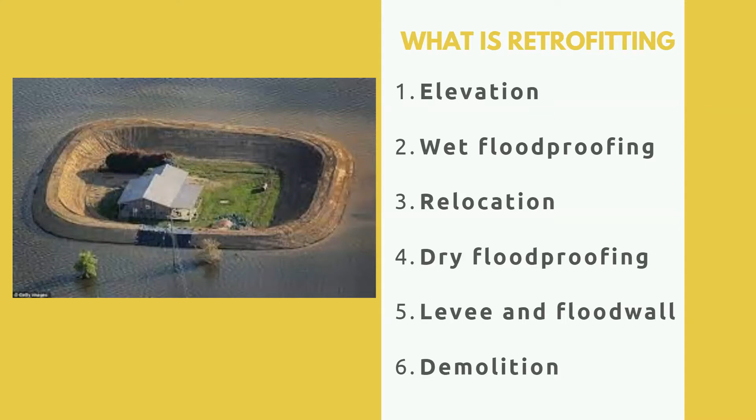In this module, we'll review retrofitting methods. Retrofitting is making changes to an existing building to protect it from flooding or other hazards. Methods include elevation, wet flood proofing, relocation, dry flood proofing, levee and flood wall, and demolition and rebuild.

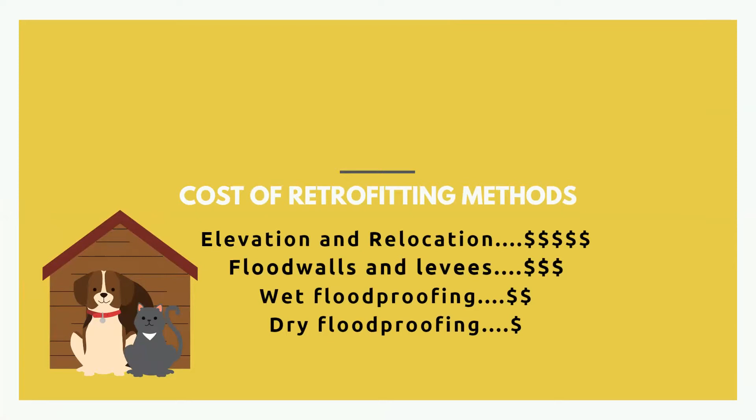It depends on many factors, including how much work needs to be done to your foundation, what other improvements you're making, the type of construction, the cost of materials, which we know are higher in Monroe County than in most places, and so on. Each project will be different, and you'll be able to work with your contractor to control some factors. We know that everyone here just wants to know how much will it cost, but it's complicated.

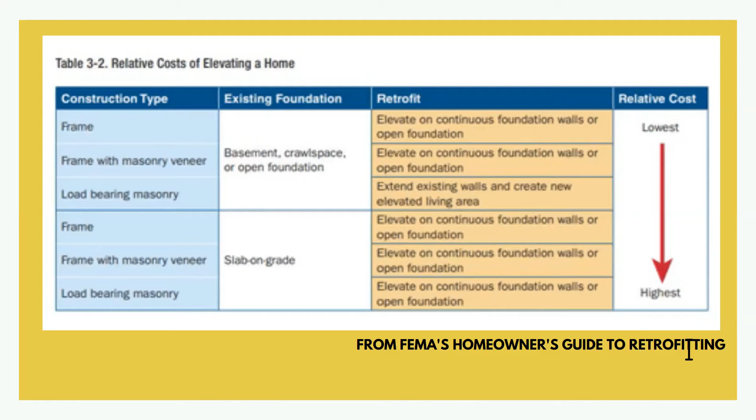So I'm going to focus on wet and dry flood proofing in this module, since elevation is covered extensively elsewhere, and flood walls and levees are not practical in the Keys with our limited buildable land. Elevation and relocation reduce insurance premiums, while wet and dry flood proofing reduce your risk of loss. So what does this mean? If you elevate or relocate your structure above the floodplain, obviously your insurance premium will be reduced.

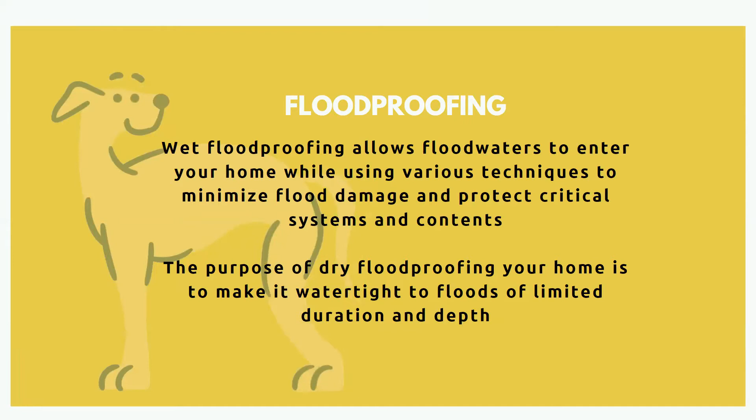If you are not ready to elevate because of the cost or other factors, wet and dry flood proofing methods may help you protect your property and make your cleanup faster and less costly, but no credits will be applied to reduce your premium. Wet flood proofing allows floodwaters to enter your home, and dry flood proofing keeps the water out for limited depth and duration.

So if the water is allowed in, then wet flood proofing methods are for spaces where you can easily move your possessions out of the way or are uninhabited. These methods can include flood vents installed in portions of your home that are not inhabited, such as crawl space or storage enclosure, installing pumps to help the water move out, elevating or relocating your mechanical systems and large appliances,

and so on. Anywhere in your home, you can also use flood damage resistant materials such as concrete, tile, stone, pressure treated and decay resistant lumber, and epoxy coatings that resist the damage and are easier to clean up.

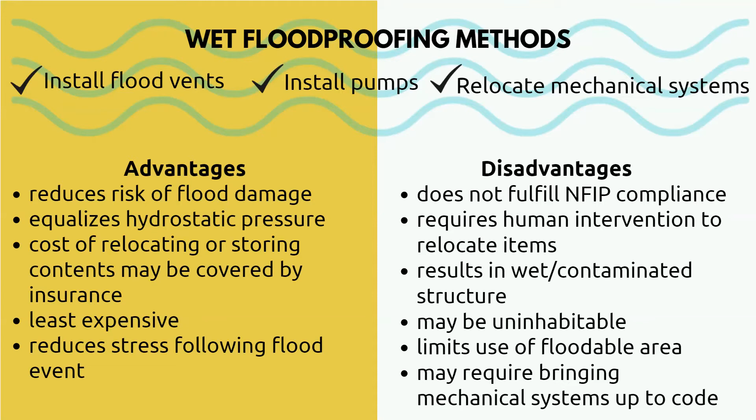Dry flood proofing involves completely sealing the building exterior up to a certain height to prevent the floodwater from entering. Water may still seep in, so you may need some sort of drainage system. This can be achieved with water-resistant coatings or membranes and shields for openings. Because the walls are exposed to the pressure of the water, these methods are only suitable for concrete or masonry structures or low flood depths of 2 to 3 feet.

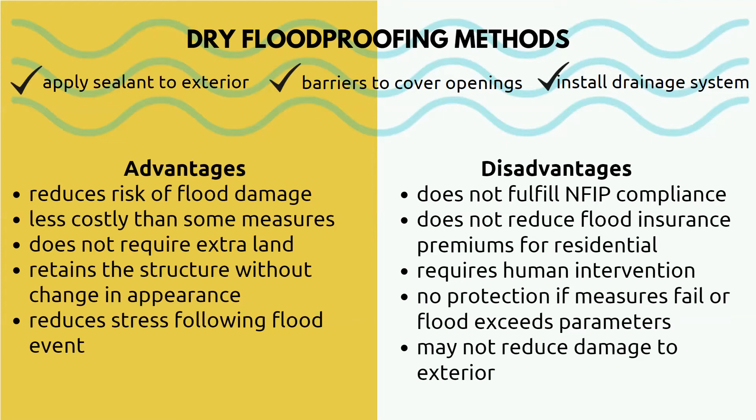Before you invest in any of these methods, talk with your insurance agent to determine the value. As I said, you won't get credit towards your premium, but if it saves you money and stress by reducing your risk, it may be worth it. Additionally, commercial buildings do receive credit from some methods of flood proofing. Talk to your insurance professional.

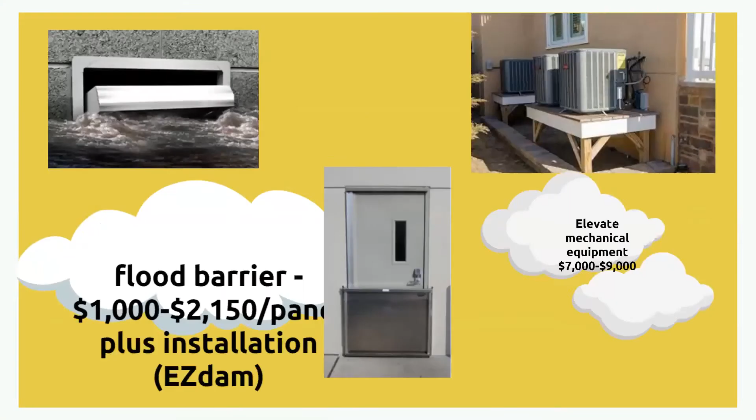This slide shows examples of wet and dry flood proofing methods and their price ranges. These may require professional design services and installation by a contractor. On the top left, engineered flood vents allow water to flow in one direction and prevent it from flowing back into your home. On the top right, we've all seen elevated air conditioners and pool equipment.

And at the bottom, the shields are called EZdams. We're not endorsing this product, but when I reached out to the company with questions, they did give me some price ranges.

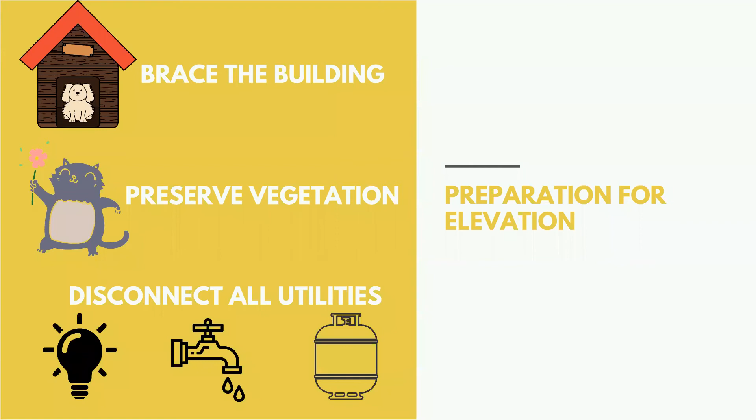You may also decide to start preserving the vegetation around your home and relocating it into pots in order to replant it later. And then you'll also have to disconnect your utilities, your electric, water, sewer, gas, and sometimes your mechanical equipment as well. Disconnecting the utilities does require approval from the local authority having jurisdiction as well, and the contractor will know how to call in all of these inspections for you.

Now that your home is prepared to be raised, the next piece is that the home actually gets built up onto those Lincoln logs, and you end up putting in your additional foundation material underneath. There's multiple foundation options, and it all depends on your soil's bearing capacity and the location of caprock. You could be putting in some new concrete piles and concrete columns coming up, potentially with some grade beams.

You might also discover that your existing home and its existing foundation are structurally stable enough to utilize those existing columns for your existing house to support a home on top of it. So you may decide that you're actually going to build on top of your existing home and abandon the structure beneath. This is an option that is very hard to come by down here, as a lot of ground level homes that were built out of CBS do not have the sufficient foundation bearing capacity that is required by the Florida Building Code as of now.

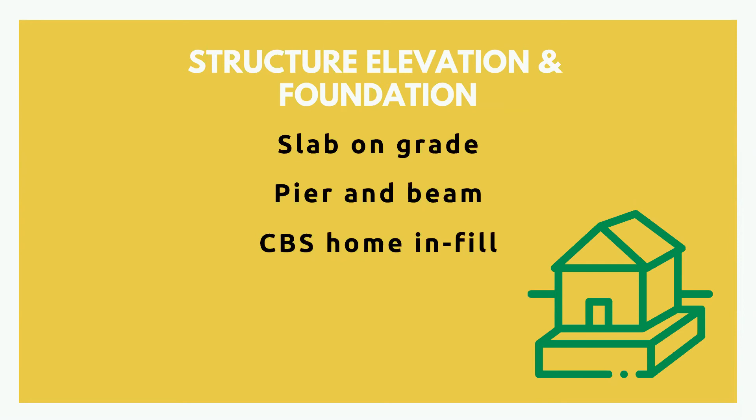Once your new foundation is in, the next piece is to lower your home back onto the foundation. In this process, there's strapping and mitigation that goes in. All the strapping will be different based on the different materials that are used in your floor structure and what your floor is connecting to column-wise. You will get your utilities reconnected. You'll be building your stairs, your ramps, your porches, anything else additional that you need there.

Everything's going to get all cleaned up. You might have some stucco work that happens on the columns below. Perhaps you are adding a ground floor concrete slab underneath, or maybe a 299 square foot ground floor enclosure, and then also landscaping. The goal of raising your home is to help with your insurance prices.

It's to help keep your premiums down, and also to keep everything looking aesthetically pleasing. Raising a home provides you with the opportunity to park your car underneath or to have additional space, but it's also making your home sturdier and hopefully will last a lot longer through our next flood condition.

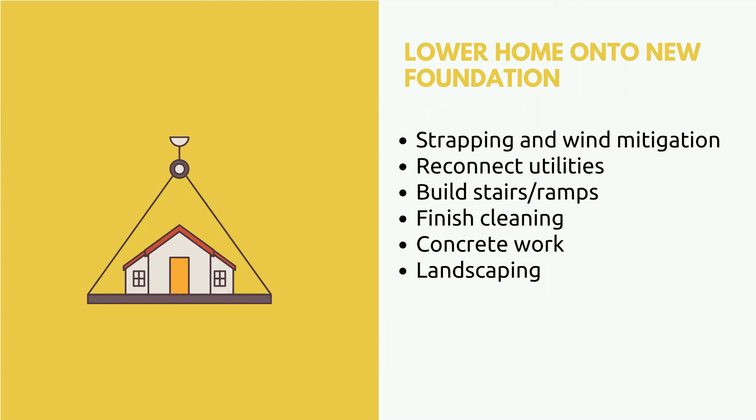Welcome to Module 4, Part 1. My name is Caroline Horn, and I'm the manager of FERM. In this module, we'll list as many possible options for funding for your elevation project. This list is not comprehensive, and we aren't recommending any of these products over the others. We simply want to make you aware of the products so you can do your own research before meeting with your banker. Only you and your banker will know what is best for you.

Mortgage refinancing is an option that can help you lower your interest rate or switch from a variable interest rate to a fixed interest rate. A home renovation loan enables you to borrow the money for needed repairs at the time you are purchasing your home. So if you're purchasing a home that you know is going to need repairs, that you intend to elevate before you've even moved in, you can get the financing ahead of time.